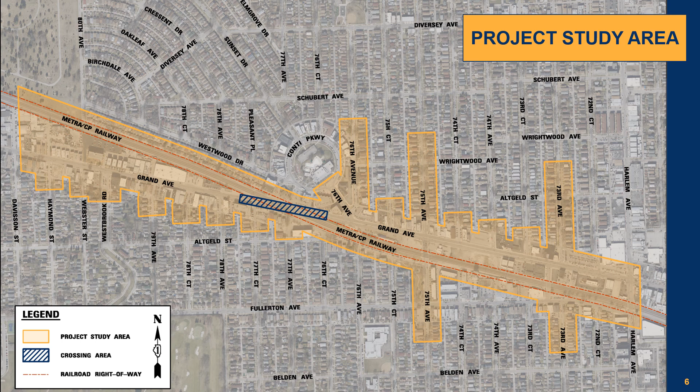The project study area is shown in orange. Grand Avenue at the Metra Canadian Pacific Railway crossing is located 0.6 miles west of Illinois Route 43, or Harlem Avenue, in the village of Elmwood Park. The approximate study limits extend from 78th Court to 75th Court along Grand Avenue, a length of approximately a half of a mile. Overall limits may be expanded as required for traffic management and construction staging, drainage and associated routing and connections, and horizontal and vertical railroad alignments, both permanent and temporary.

The project objective is to develop a preferred alternative that accommodates and improves roadway traffic and rail operations, safety, travel efficiency, reliability, and regional mobility. A grade separation would improve safety and regional mobility for vehicles, pedestrians, and bicyclists through the Grand Avenue crossing and associated corridor. In addition to improving public safety, this project has several local and regional benefits. The grade separation would reduce vehicular traffic congestion and delays and facilitate a more efficient emergency response from both the fire and police departments. A grade separation would eliminate conflicts and delay between vehicles, bicycles, pedestrians, and trains. Reliability would also be increased.

Any impacts to environmental resources, properties, and land use would also be quantified. In the event that an alternative would cause an existing property's access to be impacted or eliminated, alternate access options would be identified, evaluated, and quantified. We are more than halfway through this study. Following the public input received from this meeting, we plan to engage the public again through the fourth and final Community Advisory Group meeting. Once a preferred alternative has been determined, we will proceed to a public hearing so that the team can make any final changes before submitting for design approval, anticipated to occur in 2023.

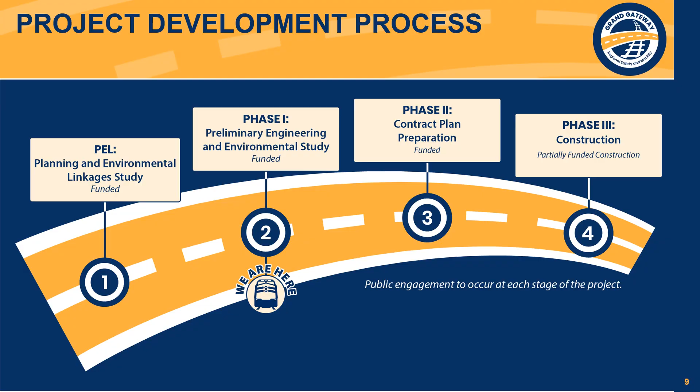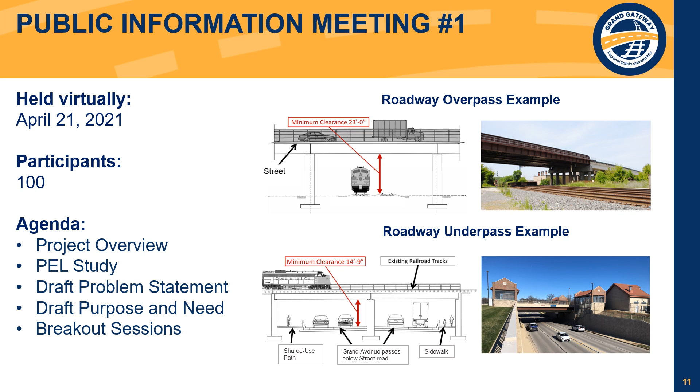Transportation projects follow a distinct process for studying, designing, contract preparation, and construction. Public engagement and involvement occurs during all phases. For this project, upon completion of the second CAG meeting, the first public information meeting was held in April of 2021. The meeting was held virtually due to COVID restrictions, and 100 people participated via Zoom. Information about the study was presented to the public, including the draft problem statement and purpose and need for the project. Virtual breakout rooms were used to facilitate discussion and allow for questions and answers. The purpose of the project is to alleviate existing congestion and improve safety and mobility to all transportation users at the Grand Avenue and Metra Canadian Pacific Railway crossing.

In order to perform an initial evaluation of each alternative, the project team utilizes a screening process. In summary, this process focuses on the following elements: the safety and overall transportation benefits of the alternative, an assessment of impacts to the environment, future land use, overall property displacements, and property impacts, including access and parking impacts, construction duration, and associated disruption during construction, such as adverse travel times, impacts to community cohesion, and overall construction cost.

In order for an alternative to be advanced for additional consideration, it must satisfy the requirements of the project purpose and need. To reiterate, the project need is defined as the 10-degree crossing skew angle results in an unconventionally long crossing, which requires vehicles an above average amount of time to traverse the crossing. The unsafe existing crossing condition causes vehicles to be potentially trapped on the railroad crossing.

The Federal Railroad Administration 2020 Accident Prediction Report ranks this crossing as the sixth most likely to have a collision out of 7,920 crossings in the state of Illinois. In 2005, the National Transportation Safety Board recommended that a grade separation be constructed at the Grand Avenue grade crossing. The current and future demands of vehicular, railway, and pedestrian traffic dictate the need to address existing deficiencies.

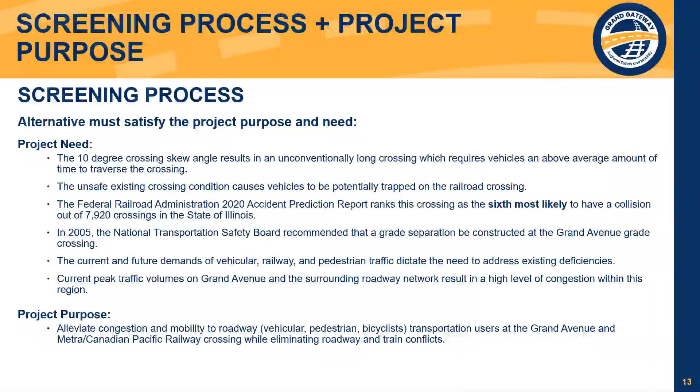3 of the 4 Community Advisory Group meetings slated for this project have been completed. The first CAG meeting was held on July 23, 2020. This meeting focused on goals and guidelines, the project overview, timeline, and the purpose and need. The second CAG meeting was held on February 18, 2021. This meeting delved into drafting a problem statement, the purpose and need statement, and developing criteria for the alternative analysis. These elements were presented in draft form at the first public information meeting.

The third CAG meeting took place on December 7, 2021. This meeting involved the review of the 6 alternatives, alternative comparisons, and the evaluation criteria weight of importance. All of the information discussed at the third CAG meeting will be shared today during this public information meeting. To understand the project better, let's talk through some background data.

Existing average daily traffic along Grand Avenue within the project area ranges from approximately 20,000 to 21,100 vehicles per day. The weekday morning and evening peak hours for the study area were determined to occur from 6:30 a.m. to 7:30 a.m. and from 4:45 p.m. to 5:45 p.m. During the morning peak hour, the primary direction of travel is westbound, and during the evening peak hour, the primary direction of travel is eastbound. Average daily traffic for the design year of 2050 is projected to range from approximately 21,500 to 24,300 vehicles per day, an increase of approximately 15%.

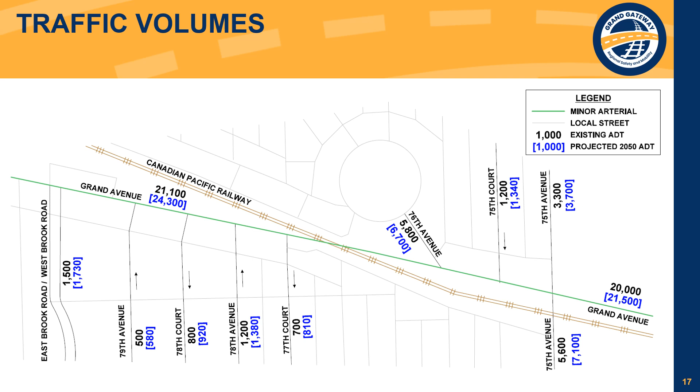In a 2007 study of crashes in the area, a total of 45 crashes were reported at the Grand Avenue railroad crossing since 1956. Of these 45 crashes, 35 crashes, or 78%, involved a train hitting a vehicle. 4 crashes, or 9%, involved a vehicle hitting a train, and the remaining 6 crashes, or 13%, involved a pedestrian. There have been a total of 8 fatalities and 27 injuries.

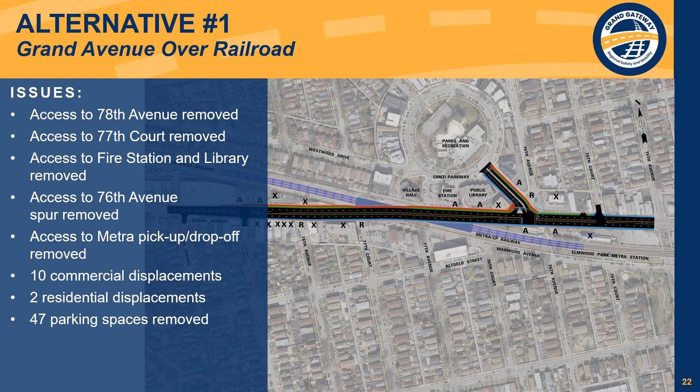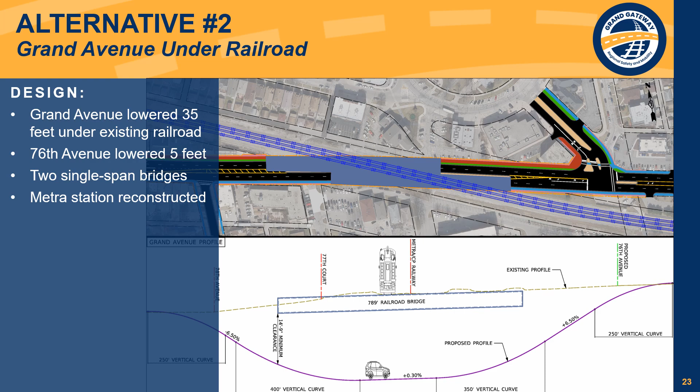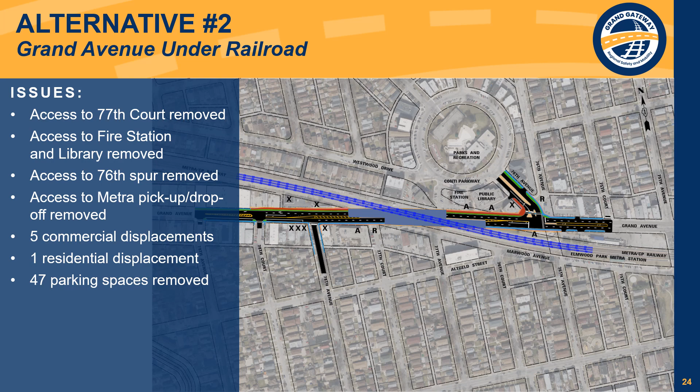Due to the lowering of the roadway profile in alternative number 2, Grand Avenue access would be eliminated at 77th Court. The rear access to the Elmwood Park Fire Station and Public Library would also be eliminated. The spur off of 76th Avenue would also be removed. Existing Grand Avenue access for the Pace bus stop and Metra station pickup and drop-off area would be eliminated. 5 commercial properties and 1 residential property along Grand Avenue would be displaced. Both on-street parking spaces and parking spaces behind the Elmwood Park Public Library and Fire Station would be impacted by the grade separation. A total of 47 spaces are estimated to be removed.

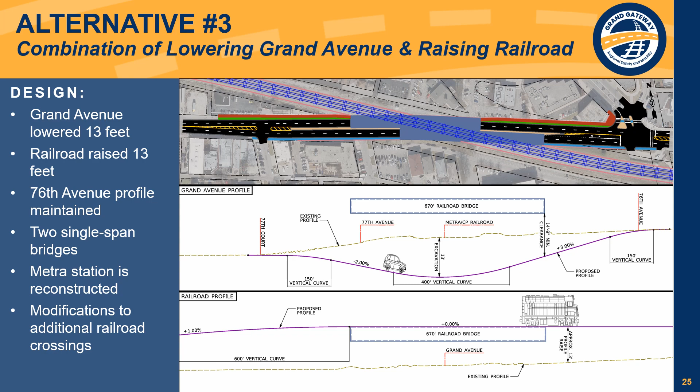Alternative number 3 lowers Grand Avenue approximately 13 feet and raises the railroad approximately 13 feet. The existing 76th Avenue profile would be maintained. 2 staggered single-span bridges with a pier in the median would carry the railroad over Grand Avenue. The Elmwood Park Metra Station would be reconstructed in conjunction with the raising of the railroad profile. Canadian Pacific Railway and Metra operations and services would be maintained during construction. Due to the raised railroad profile, the railroad crossings at 75th Avenue and 73rd Avenue would require modifications.

Due to the profile adjustments in alternative number 3, access from Grand Avenue would be eliminated from 77th Court. The rear access to the Elmwood Park Fire Station and Public Library would also be eliminated. The Metra Station pickup and drop-off area would temporarily lose access to Grand Avenue during construction. That access would be restored upon completion of the project. 3 commercial properties and 1 residential property along Grand Avenue would be displaced. Both on-street parking spaces and parking spaces behind the Elmwood Park Public Library and Fire Station would be impacted by the grade separation. A total of 21 spaces are estimated to be removed.

Noise and visual impacts are anticipated due to the raised railroad profile. 75th and 73rd Avenue will also require profile adjustments to accommodate the raised railroad profile. This will incur added cost and traffic delays during construction, along with making the 75th Avenue railroad crossing more unsafe.

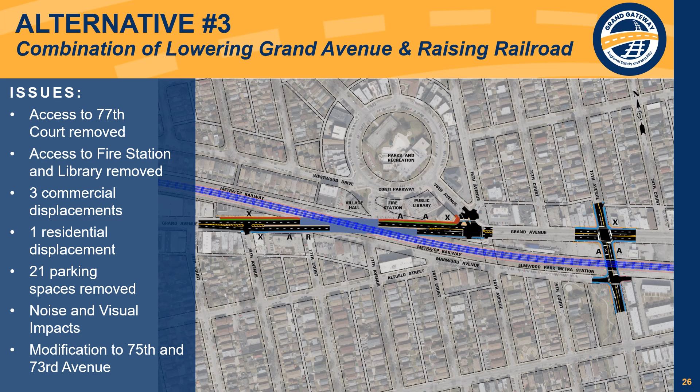Alternative number 4 would maintain the existing Grand Avenue profile and raise the railroad approximately 20 feet. The existing 76th Avenue profile would be maintained. 2 staggered single-span bridges with a pier in the median would carry the railroad over Grand Avenue. The Elmwood Park Metra Station would be reconstructed in conjunction with the raising of the railroad profile. Canadian Pacific Railway and Metra operations and services would be maintained during construction. Due to the raised railroad profile, the railroad crossings at 75th Avenue and 73rd Avenue would require modifications.

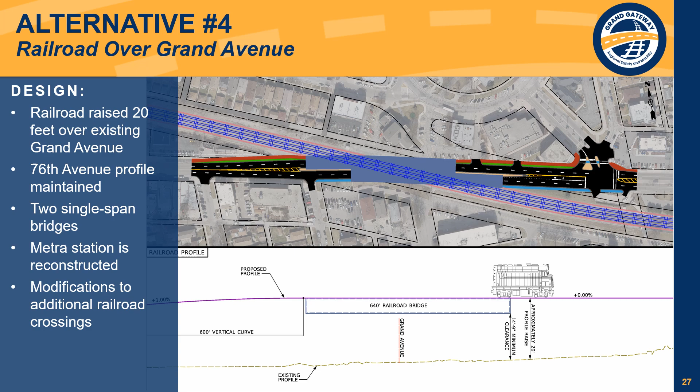In alternative number 4, there is no roadway profile adjustment. All access points from Grand Avenue would be maintained. 1 residential property along Grand Avenue would be displaced.

Since the railroad profile is raised approximately 20 feet, another grade-separated railroad bridge must be introduced at the 75th Avenue railroad crossing. This would result in added cost, constructability issues, and traffic delays during construction. The raised railroad would also bisect the community. This would create negative impacts to noise levels, visual aesthetics, and community cohesion.

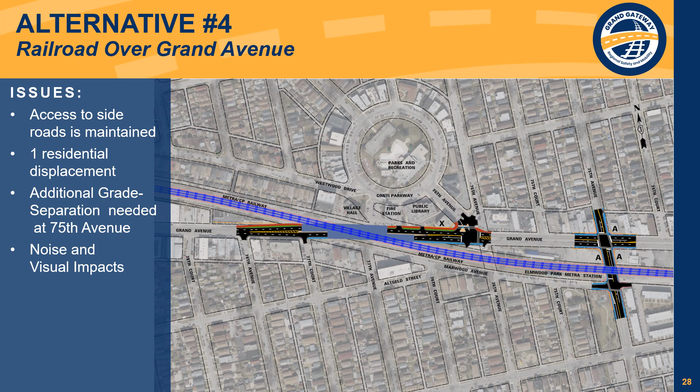Alternative number 5 would maintain the existing Grand Avenue profile and lower the railroad approximately 30 feet. The existing 76th Avenue profile would be maintained. A 3-sided concrete tunnel would be constructed to accommodate all 3 railroad tracks. The Elmwood Park Metra Station would be reconstructed in conjunction with the lowering of the railroad profile. Canadian Pacific Railway and Metra operations and services would be maintained during construction.

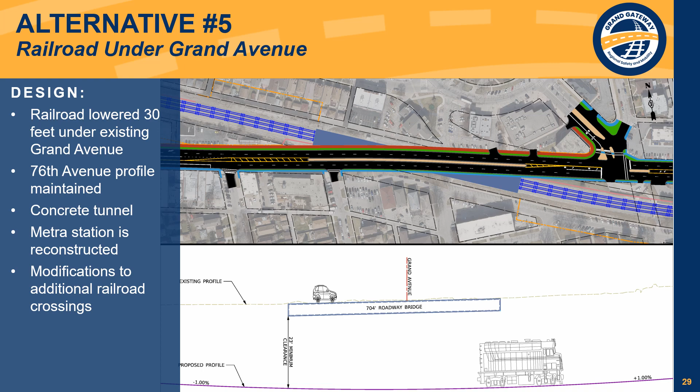Due to the lowered railroad profile, the railroad crossing at 75th Avenue, 73rd Avenue, and Harlem Avenue would require modifications. In alternative number 5, there is no roadway profile adjustment. All access points from Grand Avenue would be maintained. At least 5 commercial properties and 21 residential properties along Grand Avenue would be displaced by this design due to extensive grading. On-street parking spaces would be impacted by the grade separation. A total of 25 spaces are estimated to be removed.

The length of the impacts for lowering the railroad profile extend beyond the scope of the project study area. 3 additional grade separations are needed to achieve this design. New railroad bridges must be constructed at 75th, 73rd, and Harlem Avenue. This would incur massive extra costs, traffic delays, and constructability issues.

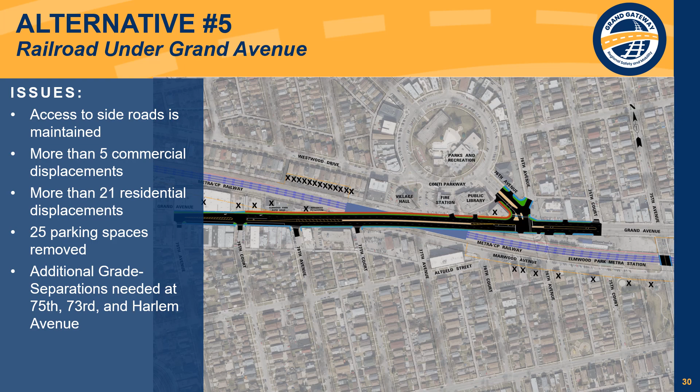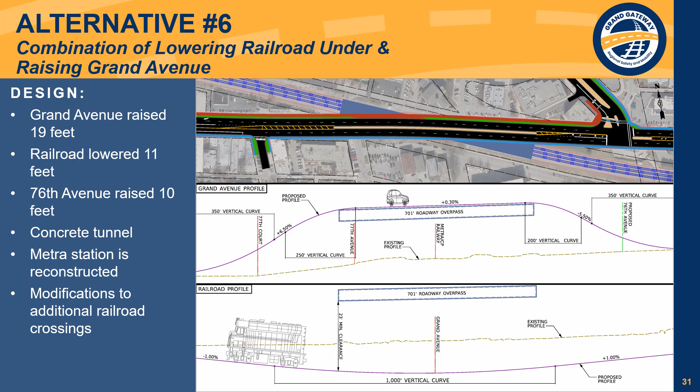Alternative number 6 would raise Grand Avenue approximately 19 feet and lower the railroad approximately 11 feet. Consequently, 76th Avenue would be raised approximately 10 feet to meet the proposed Grand Avenue profile. A 3-sided concrete tunnel would be constructed to accommodate all 3 railroad tracks. The Elmwood Park Metra Station would be reconstructed in conjunction with the lowering of the railroad profile. Canadian Pacific Railway and Metra operations and services would be maintained during construction. Due to the lowered railroad profile, the railroad crossing at 75th Avenue and 73rd Avenue would require modifications.

Due to the profile adjustments in alternative number 6, access from Grand Avenue would be eliminated from 77th Court. The rear access to Elmwood Park Fire Station and the Public Library would also be eliminated. The spur off 76th Avenue would also be removed. Existing Grand Avenue access for the Pace bus stop and Metra Station pickup and drop-off area would be eliminated.

3 commercial properties and 1 residential property along Grand Avenue would be displaced by this design. Both on-street parking spaces and parking spaces behind the Elmwood Park Public Library and Fire Station would be impacted by the grade separation. A total of 44 spaces are estimated to be removed.

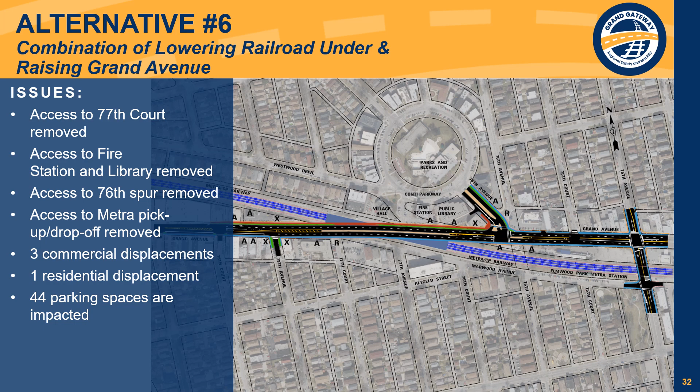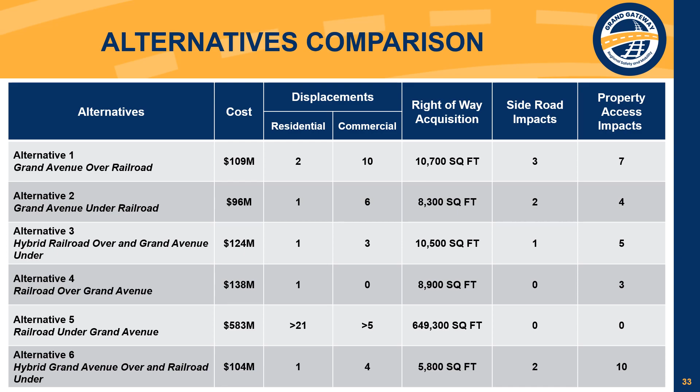Now let's talk about next steps for the project going forward. Following this meeting, the 4th Community Advisory Group meeting will be held to review the comments received from the public. These comments will help the team refine the alternatives and determine a preferred alternative. That alternative will be presented at a public hearing in 2023. During the public hearing, residents can provide comments on the record regarding the alternative.

The team will then present the study and preferred alternative to IDOT for design approval. Once approval is received, the village will work to advance the project into the next stage of design and will continue to work to secure funding assistance for construction. If you would like to comment on the alternatives or other aspects of the public information meeting or project, please note that comments will be accepted for this public information meeting until June 7th, 2022.

You are invited to review the exhibits in the gymnasium and ask questions. Project team members are located throughout the area and comment forms are available if you'd like to leave written comments.